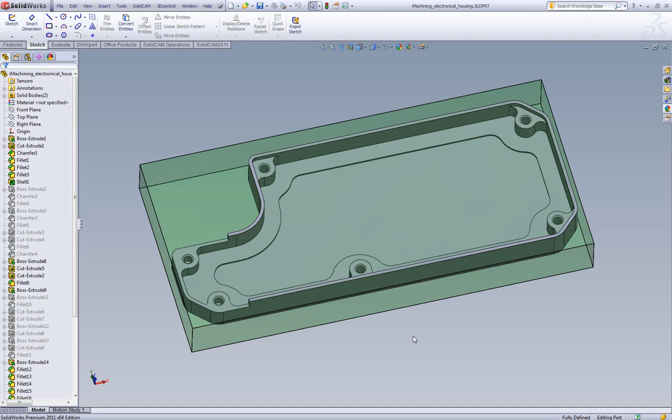In this video, we're going to give an introduction into iMachining. iMachining is a revolutionary new machining technology created by SolidCAM. So first thing we're going to do is we're going to create a new milling project on this part.

We're going to define our coordinate system. It's as simple as picking on the face we want. I like to put my coordinate system on the back left corner, so I'll just shift it there. Accept all my default clearance levels. Going to define our stock. The default is a 3D box, but I already have my stock modeled, so I'm just going to pick it. Same thing for the target. I'm going to just pick that off of the screen.

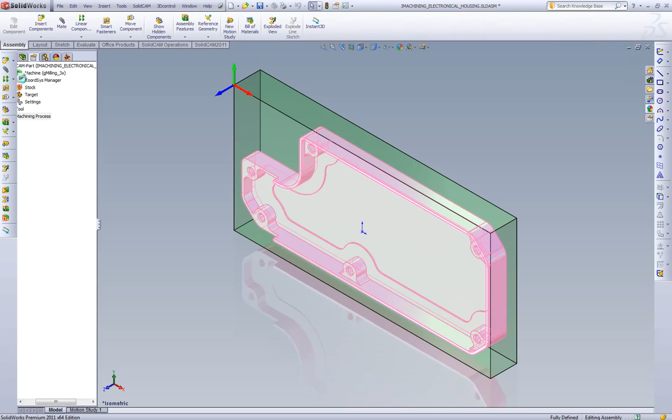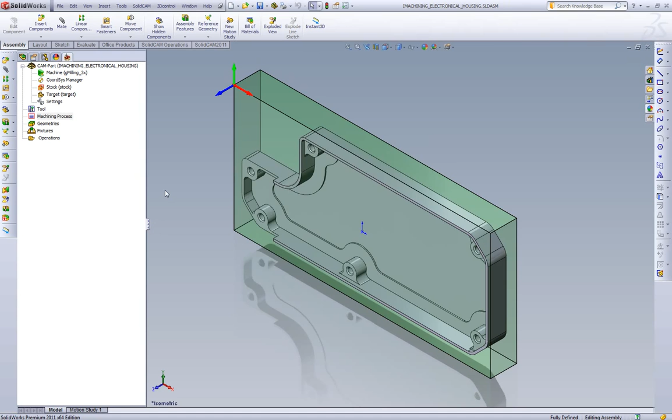For iMachining, we need to pick our machine, so we'll pick our Haas VF2SS. For our material, we're going to pick an aluminum, and we'll pick our machining level to default to 6 for this project. Now we have our part ready for iMachining, or for operation creation. So what we're going to do is we're going to make our iMachining operation.

When defining the operation, the first task is to define the geometry. I'll tilt this part down so we're looking at it as it would be sitting in the Haas. I'm going to pick this outside stock chain. I'm going to pick the part chain. And I'm going to tell SolidCAM that that outside chain is open. It's going to change to black.

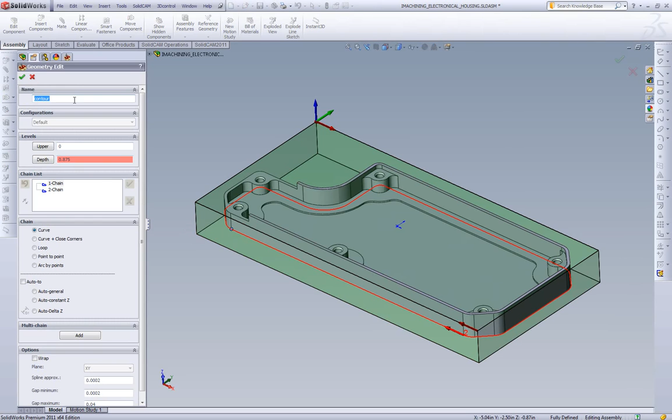This is going to allow SolidCAM to know that that is material and that it is going to be able to plunge and machine from the outside, and that's also where the stock is coming from. We're going to pick the bottom of our part, which we see is 875, and I'm just going to name my geometry outside.

Next, we need to define our tool. We'll define a tool from scratch and show how easy this is in SolidCAM. So we're going to pick a 1/2 inch end mill. We'll say that the tool's going to stick out 1 1/4 inch, shoulder length 1 inch, cutting length 1 inch, and number of flutes is 3. We'll also go and throw a holder on this. So we'll just go pick this 1 3/4 inch, and we will select it.

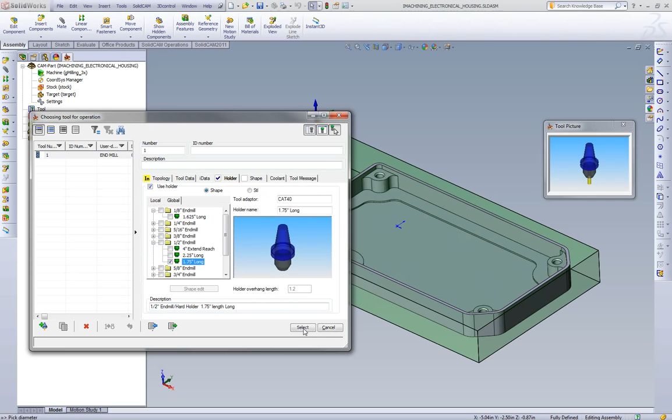Since we're machining the outside shape of the part, we want to go a little bit deeper. So we're going to go an extra 20 thou past the bottom of our part. And what we can do now is just calculate the toolpath. And go to our simulation. I'll play through this one time first, and then we'll talk about what the toolpath is actually doing.

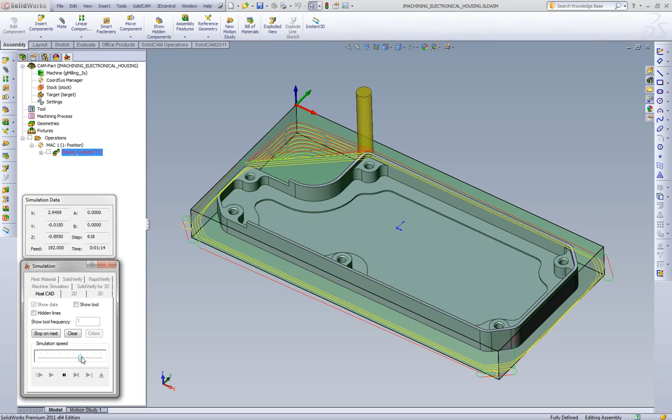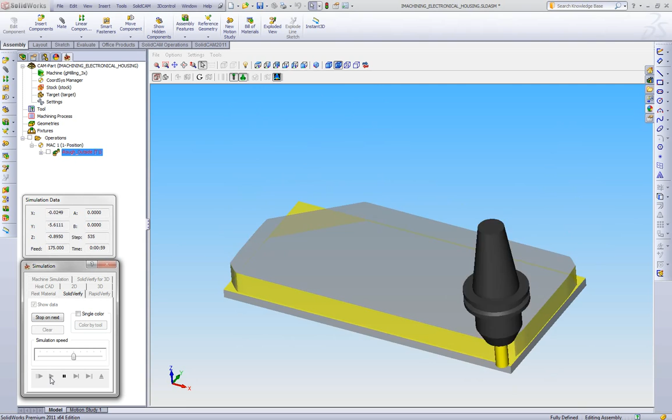So there's the toolpath to machine that outside shape. We'll go play this in the SolidVerify so we can see what it looks like removing the material. And then once it's finished with this, we'll go back to the wireframe toolpath and we'll show what the different features of the toolpath are.

Okay, so the first things we want to talk about with iMachining is what are the main goals we're trying to achieve. The main goal we're trying to achieve with iMachining is to do morphing spirals. What we consider a morphing spiral is a spiral that is not circular, but it is done off of a shape. We call it morphing because unless you have a perfect circle, there's no way to make it go to

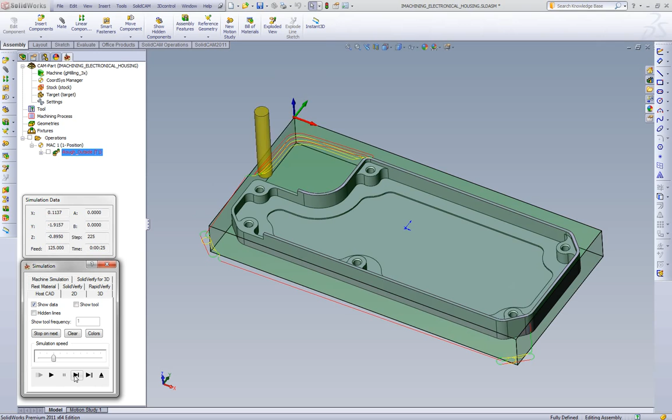some other shape. So we work between a range of minimum and maximum step over, and this allows us to morph to any geometry, not just a circle, and create a spiral, which is keeping the tool in contact the entire time. So we'll play the beginning of this toolpath, and what we'll see is SolidCAM, on this outside shape, is first preparing the corners, and if we look at a top view, it'll help explain what we're looking at.

The areas where we have the most amount of material are the 4 corners. Now in the corners where there's the least amount of material, we see it only had to do 2 passes. In this area where we have a lot of material, it's actually going to do multiple passes. And what it's doing is it's actually preparing to do a spiral.

Since there's no way to do a complete spiral on this without having the tool in contact all the time, we prep the material. So we're prepping the outside corner. Soon as we're done the outside corner, then we're going to go to what we call our morphing spiral. Well, let's play through 2 loops so we can show something here. There's the first loop, and here is the second loop.

Now what we see here is SolidCAM's morphing spiral. In the area that we have the least amount of step over, or the least amount of material, we have the smallest step over. In the areas where we have the most amount of material, we have the biggest step over. So we work with like a degree of freedom with our range of step over, and this gives the tool the ability to do morphing spirals and keeping the tool in contact the entire time.

As we look at our feed rate over here, what we'll see is SolidCAM is also doing feed rate adjustment. So in the areas where there's a smaller step over, we're increasing the feed rate to maintain efficiency. So as we single step through this, we can see on the thin areas it goes to 256 inches a minute. As we come to the thick area, we can see the feed rate slow back down to 147 at the thickest point.

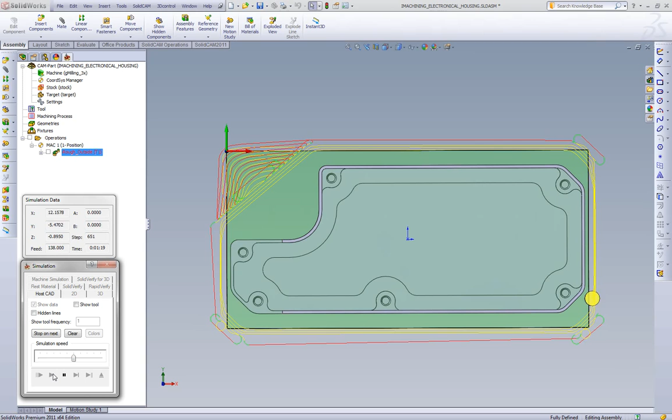It continues doing the spiral toolpath, and then at the end, it'll go and clean out this internal area over here. Now some things to note when we look at iMachining from a side view: there are no retracts, none at all in this toolpath. There's only the one entry and the one exit. So SolidCAM is able to keep the tool down in the pocket and not have wasted machine time wrapping around the part.

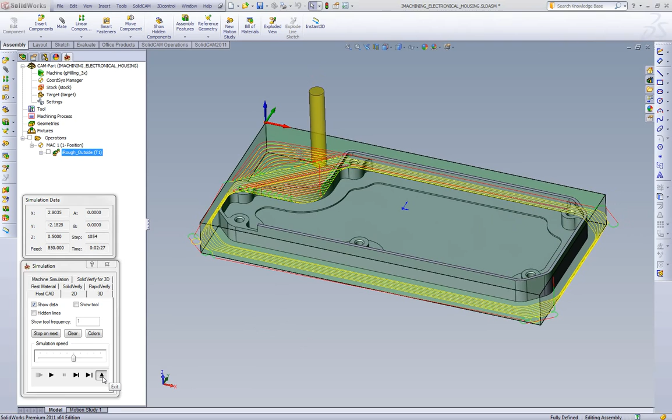Now that we went over the toolpath, we want to go over the technology wizard. What our technology wizard is doing is creating all of the cutting conditions for the toolpath to follow: feeds, speeds, step overs, depth of cut. How we've created the technology wizard is we've done 3 years of live testing on a complete range of tools, complete range of machines. We've done testing all the way down to 0.040 end mills in hardened steel.

We've done titanium testing. We've done steel, stainless steel, aluminums. We've used all sorts of different size tools with 2 flutes, 3 flutes, 4 flutes, 5 flutes. We've done different machines. We've tested on Haas, Mazaks, Hurcos. And what we've done is we've developed an algorithm that ties all of that information together. What we're not doing is creating an Excel database of feeds and speeds like many people have tried before.

What we're doing is creating an algorithm where we define a machine that has a certain maximum RPM, feed rate, etc. Then we have a material which has certain physical properties, and then we also have our end mill, which has so many flutes, a certain diameter, so much flute length, it even has pitch for the flutes. And then we devise a cutting condition for that specific condition.

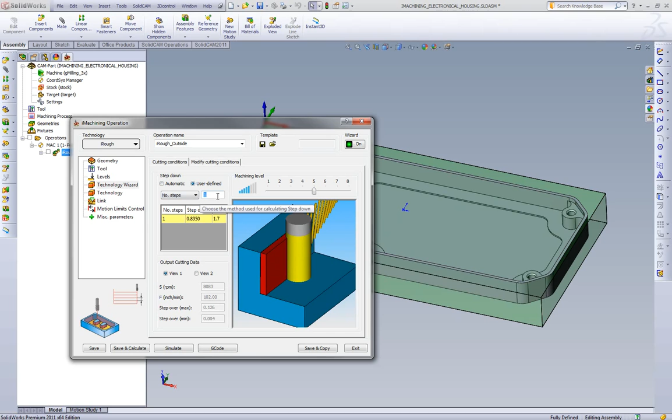Now what's important to note here, as I said before, is this is not an Excel database of feeds and speeds. So let's say, instead of doing this in one cut, which is 0.895, we wanted to do 2 depth of cuts. What you can see is SolidCAM is adjusting everything based on what depth of cut we're doing. The step over jumped from the 0.126 to the 0.207. If we go back to 1 depth of cut, we can see the 0.126 at 0.895. If we do 2 depth of cuts, where we're cutting 0.4475, we go to 0.207.

So in this manner, we can see that iMachining is being very intelligent, and it's trying to adjust for all of the conditions that we change. So every geometry you pick, every depth of cut, every tool that you pick, we're going to adjust feed, speed, step overs, and make sure all of them are synchronized and perfect the entire time. And then we have our machining slider, which is giving you, the machinist, the freedom to pick what works the best.

As we know, we can achieve great things, but to achieve high feeds and speeds, we need to have all the right things set up. We need to have the perfect fixturing, the perfect tooling, and the perfect tool holders. So this gives us freedom, and we get less cutting force and those types of parameters as we go lower in the machining slider. So if we know our part's not held very rigid, we can pick a low machining slider.

Let's say it's not very rigid just because of the machine, we can go slower. If we're doing a prototype part, we can go slower. Generally, most of our customers are going to work in the 3 to 6 range, which is just average. But if we know we're holding good, we can go high. And if we know we're holding not so good, or we're having tough times with chip evacuation, or not good coolant in the machine, we can go down to the low end.